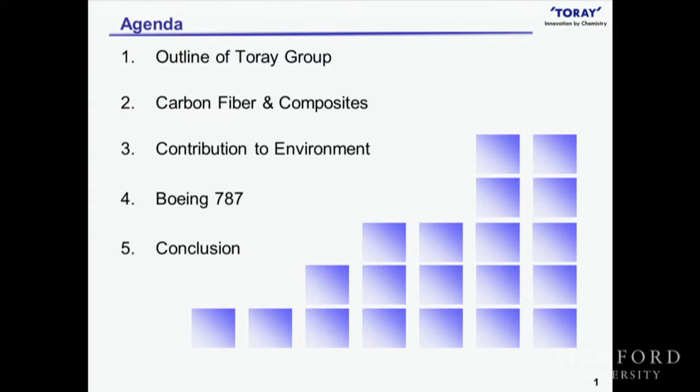This is an outline of Toray Group. Toray was established in 1926, almost 85 years ago, as a rayon manufacturer. The name Toray is an abbreviation of Toyo Rayon. Toyo means Oriental, and rayon means rayon, chemical fiber. So Toray was established as a rayon manufacturer in 1926.

Then we expanded our business into fibers and textiles, plastics and chemicals. Those are kind of our foundation business. However, as you can imagine, fibers, clothing, textiles, or plastics are mature businesses. So we needed to expand into different fields like IT-related products, carbon fiber and composite materials, together with life science and similar areas.

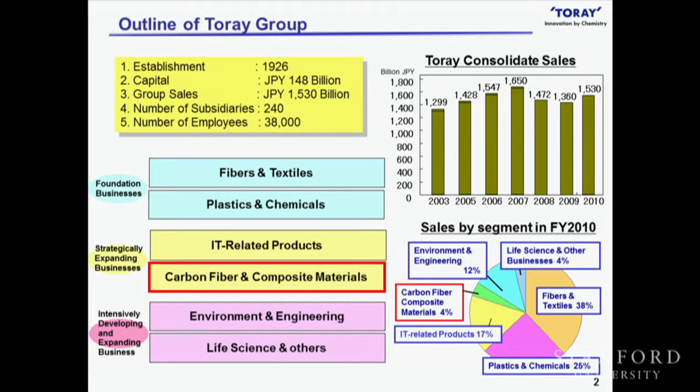Our consolidated sales are almost 1,500 billion yen, which is almost 15, more than 15, maybe 18 billion dollars at today's rate. This is our sales by segment: fibers and textiles, plastics and chemicals. Those are still our main business. However, we put lots of resources into expanding these new businesses.

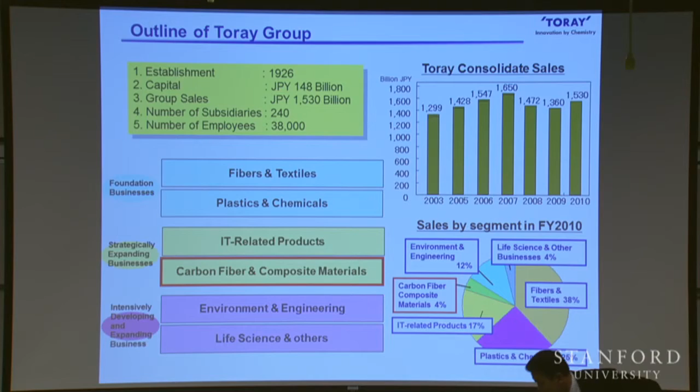This is our major product. I'm not sure you're familiar with Uniqlo. Uniqlo is an apparel retailer in the United States and Japan, and we extensively supply this Heattech material, which has a function where if the underwear absorbs water, it generates heat. So it's very warm even in winter—this underwear can keep body temperature. Those functions allowed us to go into business with Uniqlo.

This winter, Heattech underwear from Uniqlo will sell almost 100 million pieces in a year. Other products: I think you're familiar with SunChips, the compostable or biodegradable bag. Toray Plastics America, located in Rhode Island, produces this biodegradable bag. Other than that, we have interferon medical products that we produce. Then our carbon fiber materials—as I said, Boeing 787 extensively uses our carbon fiber products.

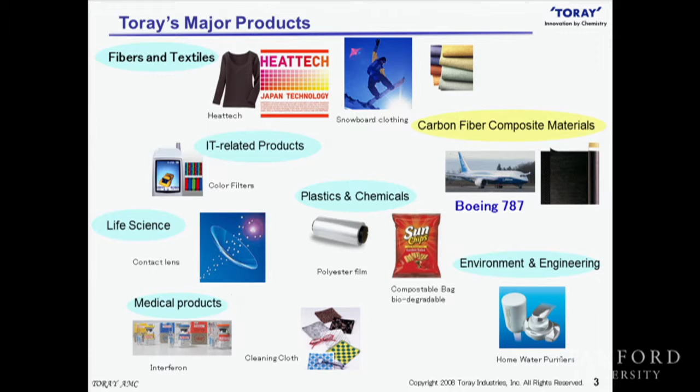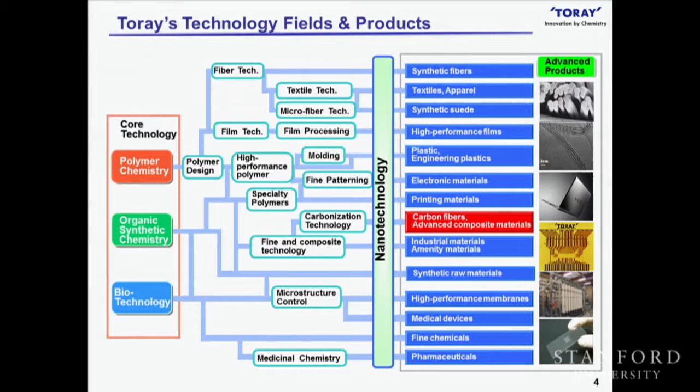Toray is a material company. Our core technologies are polymer chemistry, organic synthetic chemistry, and biotechnology. We combine those technologies, then with nanotechnology we create materials for various products.

This is also a kind of overview of the change in our business fields. This is rayon—we stopped the rayon business in the 1960s. Now it's fibers and textiles, resin and films, and new products like carbon fiber materials.

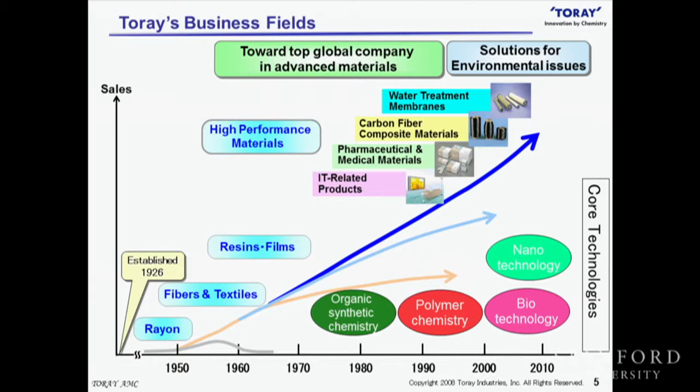Okay, let's change the topic to carbon fiber itself. Carbon fiber is carbon, the fiber. Since fiber means very thin, long materials. If we go to a yakitori restaurant or Japanese restaurant, you can see charcoal. Charcoal is a kind of carbon, however charcoal is this type of shape. However, carbon fiber, we call it charcoal, but in fibrous shape.

So first we make acrylic fiber. Acrylic fiber is used for blankets or sweaters, artificial sweater or something like that - those are the same fiber. And then we burn, or we grill, the acrylic fiber to make carbon fiber.

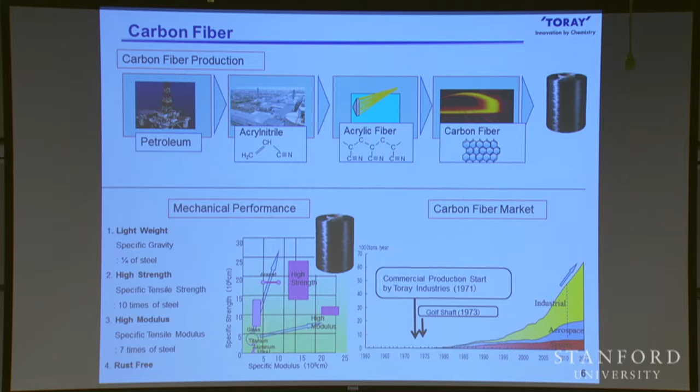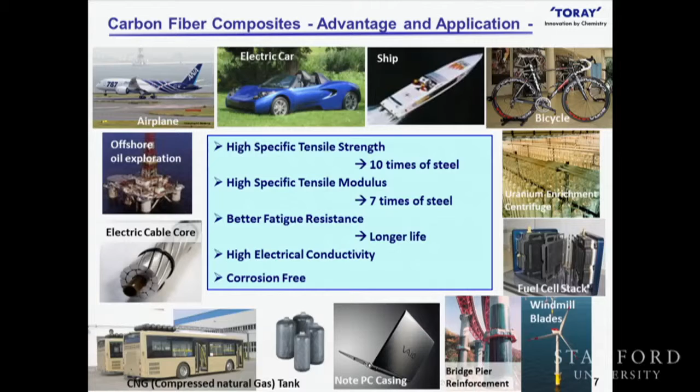These are the applications of carbon fiber. As I said, with those advantages, carbon fiber can be used for airplanes, automobiles, ships, boats, bicycles, uranium enrichment centrifuges, fuel cells, wind blades, CNG tanks, or something like that. Carbon fiber has been applied in various applications.

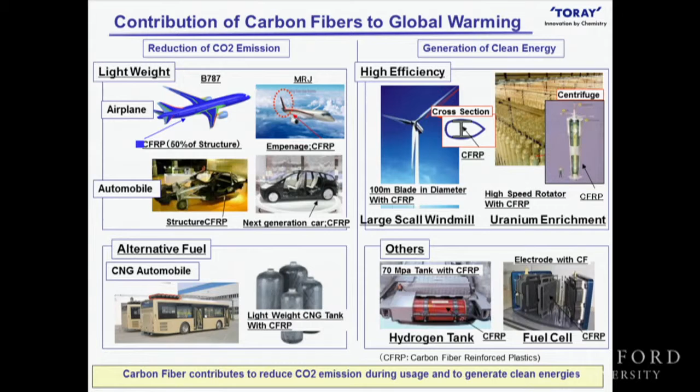So carbon fiber, since it's lightweight, contributes to the reduction of carbon dioxide emission, or generation of clean energy or alternative fuel, or others. Especially the reduction of carbon dioxide emission - carbon fiber contributes a lot to emission reduction. So with several slides, I can explain how carbon fiber contributes to reducing carbon dioxide emission.

JCMA means Japan Carbon Fiber Manufacturing Association. Toray is one of the members of JCMA. For automobiles, we choose a model - for example, those are the specifications of the model of automobile. And this is the specification of a model of airplane. So JCMA is the Japan Carbon Fiber Manufacturers Association, yes.

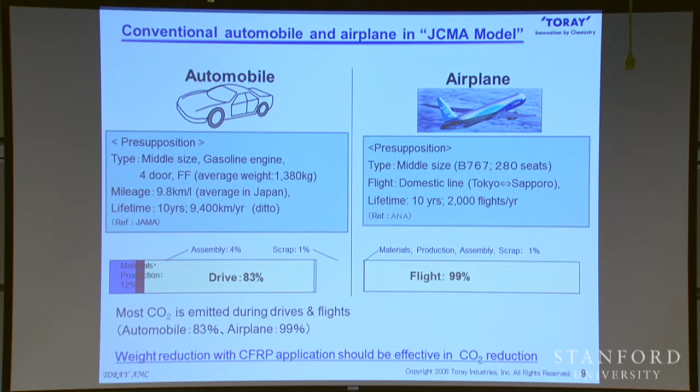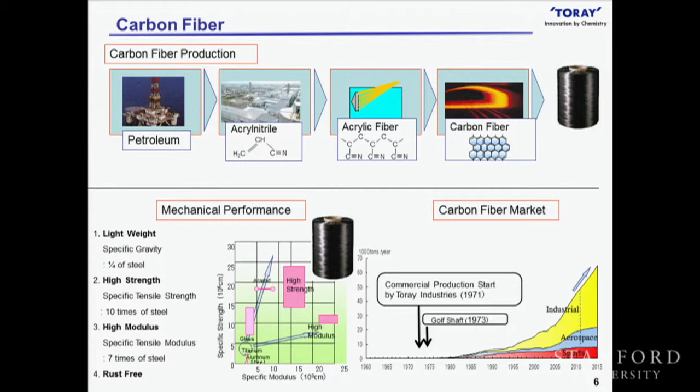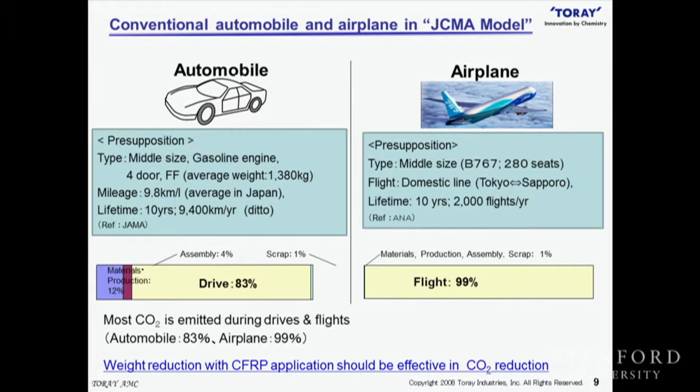Since carbon fiber - as I said, we burn or grill the acrylic fiber to make carbon fiber - during producing carbon fiber we use lots of energy. However, carbon dioxide emission in material production is only 12%. Drive or flight is the major portion emitting carbon dioxide.

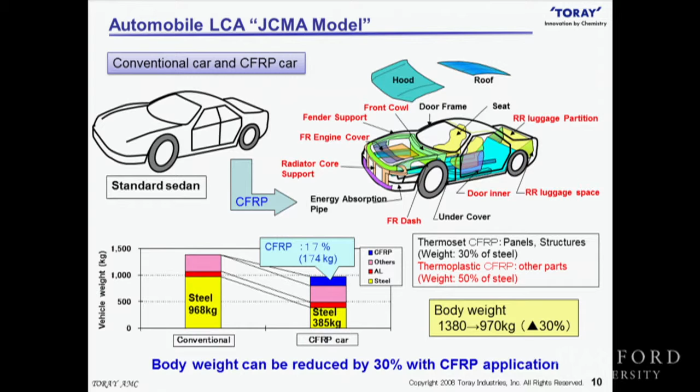And if we use carbon fiber in the automobile, we can reduce the body weight from 1,400 kilogram to less than 1,000 kilogram - a 30% reduction can be achieved by using carbon fiber reinforced plastics. That's a very important acronym you'll hear more about in the future, CFRP - carbon fiber reinforced plastic.

And if the airplane uses carbon fiber reinforced plastics, 20% weight reduction can be achieved. Actually, this is a Boeing 787 - the blue portion is carbon fiber. The main wing, fuselage, empennage, and vertical fin - those parts are made of carbon fiber reinforced plastics. So 20% weight reduction can be achieved.

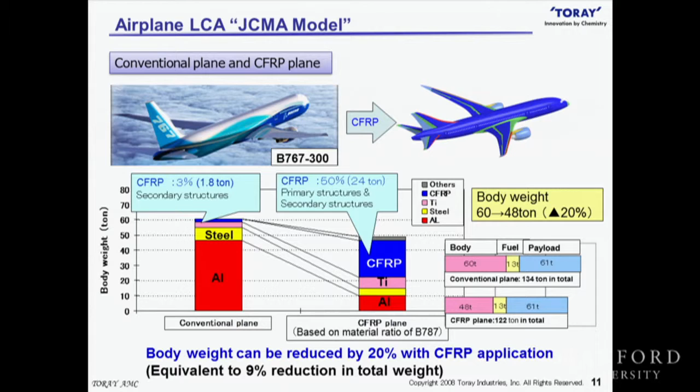So for automobile, 30% weight reduction means 0.5 ton carbon dioxide reduction per car per year. And for airplane, 20% weight reduction means 2,700 ton carbon dioxide emission can be reduced.

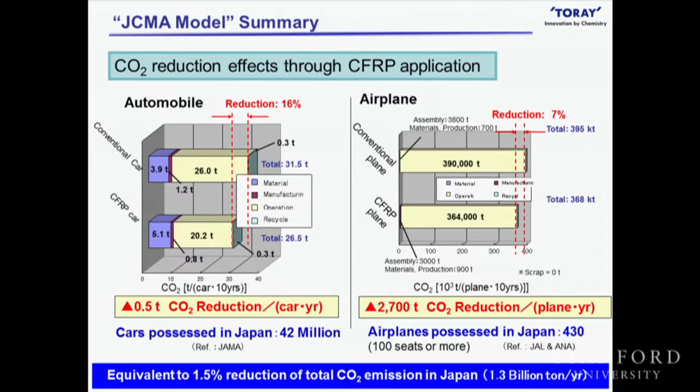So for automobile carbon fiber: if we produce 1 ton of carbon fiber, 20 tons of carbon dioxide is emitted. However, if automobile uses 1 ton of carbon fiber, 50 tons of carbon dioxide emission is reduced - meaning 30 tons of carbon dioxide can be reduced during the lifetime of the automobile. That means 19 million tons of carbon dioxide across 37 million automobiles in the world.

How about the airplane? Carbon fiber 1 ton, 20 ton carbon dioxide emission - that's the same. However, if airplane uses 1 ton of carbon fiber, 1,400 tons of carbon dioxide can be reduced - huge. So that means from the viewpoint of LCA, life cycle assessment, of automobiles or airplanes, carbon fiber is considered an environmentally friendly material. Even though the production of carbon fiber emits carbon dioxide, if we consider it from the viewpoint of LCA, carbon fiber is a very environmentally friendly material.

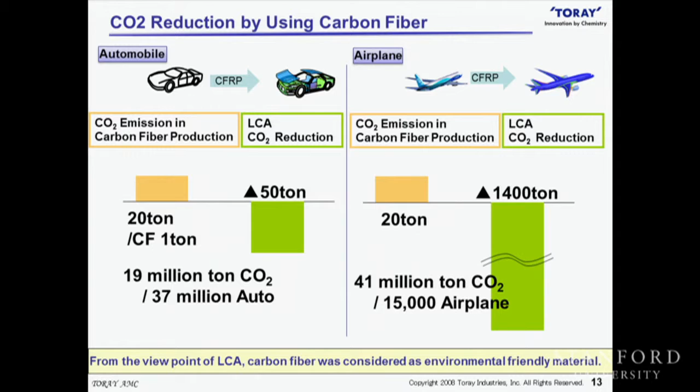Okay, let's change the topic a little bit. I think you can understand that carbon fiber is mechanically a very superior material compared to steel, and also economically and environmentally friendly material. However, it took a long time to get to this point, the 787.

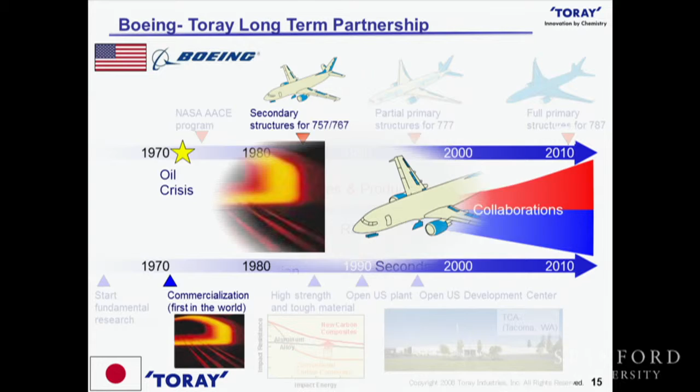We need to work together with airplane manufacturer Boeing. First, we commercialized the carbon fiber, and Boeing used our carbon fiber as a secondary structure, as kind of a test. Secondary structure means if this structure broke, the airplane can still fly, even though this part broke or failed.

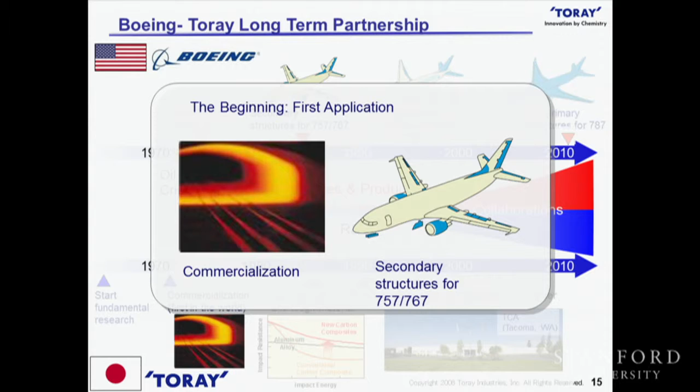Those are not essential materials for the airplane, like the spoiler or flap. Boeing first applied carbon fiber to the secondary structure for the 757 or 767 in the 1980s. Then Boeing first applied our carbon fiber to a primary structure of the 777, the empennage, those bars to support the fuselage. Those are primary structure.

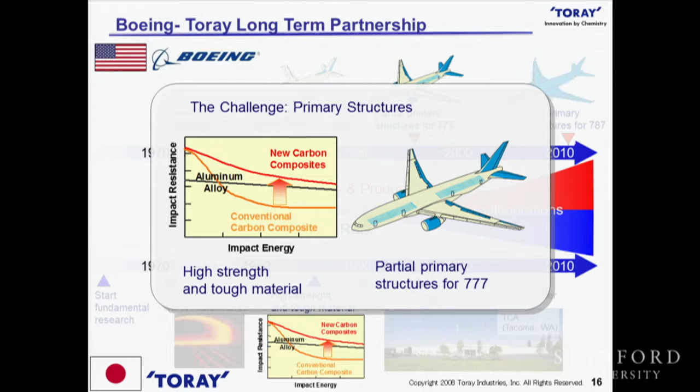And in order to achieve the primary structure carbon fiber, we had a very big breakthrough in technology. As you can see, this is impact resistance, and this is the impact energy. Horizontal axis is the impact energy.

So for conventional carbon composite, our CFRP, if big impact energy is applied, impact resistance deteriorates very much. For example, if impact energy is applied to this material, it easily breaks. That was conventional carbon composite. So we couldn't use this kind of carbon composite for primary structure, because if something fell on the empennage, it would easily break. It's not an airplane material.

So we applied energy absorbing material in the carbon fiber composite. Then we solved these issues. And then Boeing applied our carbon fiber to the 777 primary structure.

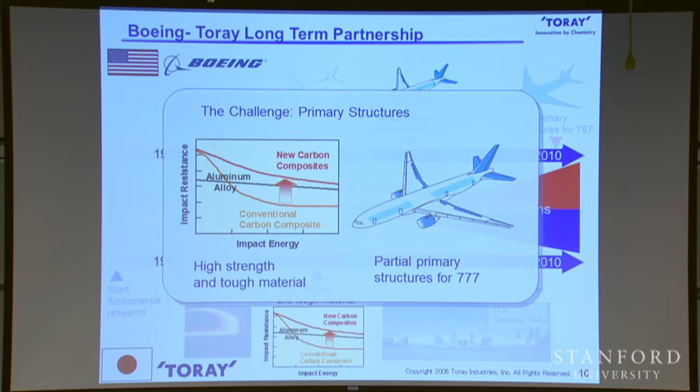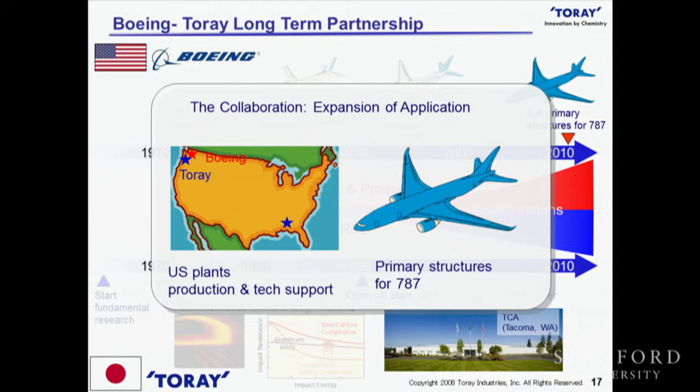After that, we put a plant in the United States. This is a carbon fiber plant, Toray Composite America. This is a resin-impregnated sheet product supplied to Boeing, and Boeing decided to use Toray's carbon fiber for all the primary structure of Boeing 787.

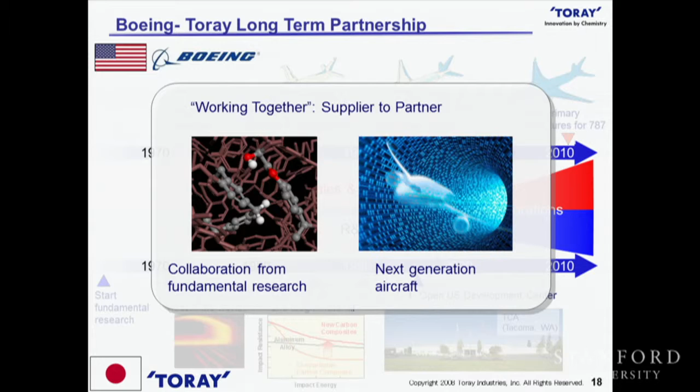Then we also worked together with Boeing on next generation aircraft. So it was not only the good performance of the material, but we also showed Boeing that carbon fiber is an environmentally friendly material. However, it takes 20 or 30 years to achieve Boeing's decision to use carbon fiber extensively in primary structure.

So let me summarize the carbon fiber application for airplanes. In 1982, Boeing applied carbon fiber to the 767 as a secondary structure, just 3% of the aircraft.

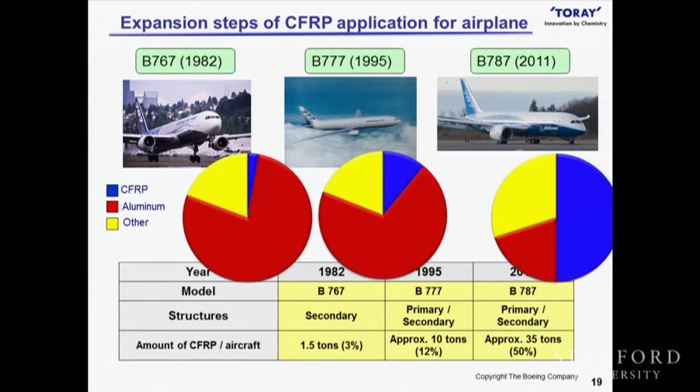In 1995, Boeing decided to use carbon fiber as a primary structure for the 777, almost 10 tons of carbon, 12% of structural weight. Then for the 787 in 2011, primary structure was approximately 35 tons, almost 50% of structural weight made by composite, a 20% reduction.

So in the 40 years after we commercialized the carbon fiber, we have been studying to make stronger carbon fiber. Compared to 1970, it is now almost 5 times stronger than the first commercialized material.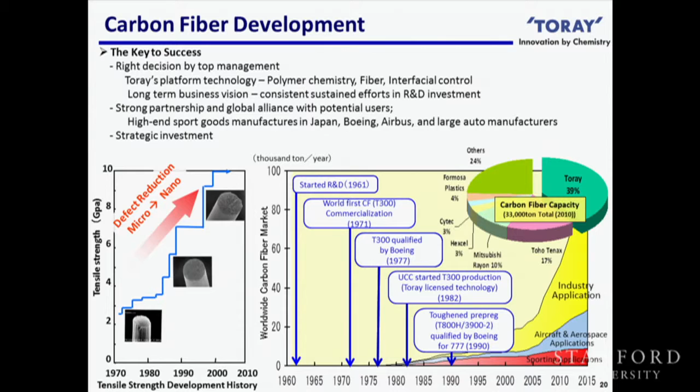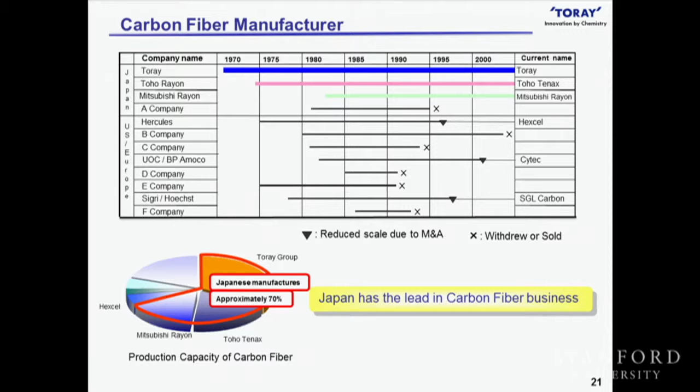Toray right now has almost 40% share of the carbon fiber market. Since it takes time to apply a new material to a good application, there were lots of American companies trying to enter this carbon fiber market. However, they gave up, almost all of them, since it takes time to expand the business. So currently, the three Japanese producers, Toray, Toho Rayon, and Mitsubishi Rayon, have the lead in the carbon fiber business. This is the current situation of carbon fiber.

Okay, this is my thought on how to achieve successful innovation, or to realize innovative material. We need technology as well as management. For technology, we need to establish a world number one position in core technology, and then we need to put effort into continuous development.

For example, new material takes time. However, it is unable to make a revolutionary aircraft like Boeing 787 without new materials. Boeing calls the 787 a Dreamliner, but that is not just Boeing's dream, it's Toray's dream too. We dreamed to make a carbon fiber airplane. So Boeing 787 is kind of a realization of our dream.

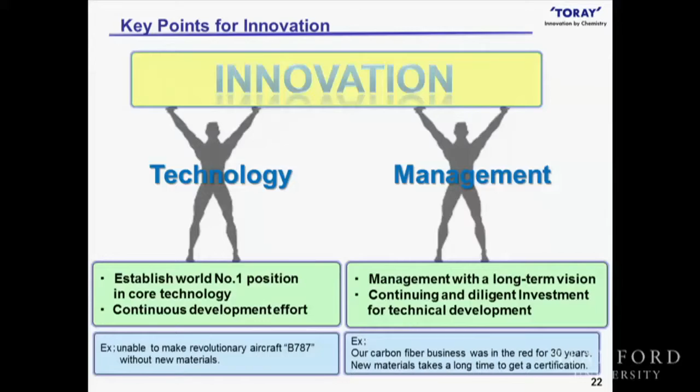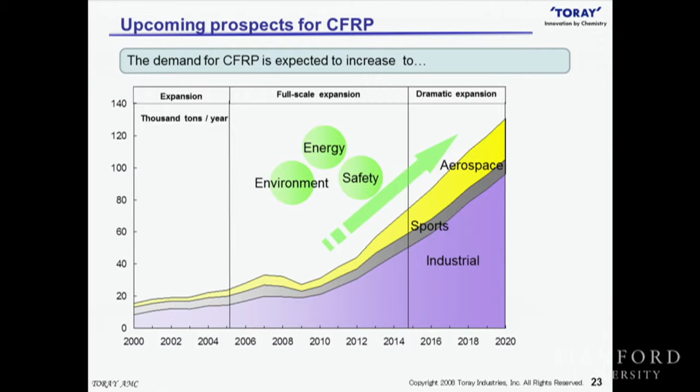Okay, this is my last slide. So we really believe that carbon fiber will expand its application. But a key point is cost reduction. The price of steel is almost $1 per kilo or something like that. But carbon fiber price is more than $10 per kilo.

So we need to make an effort to reduce the cost continuously. Of course, carbon fiber has superior performance. However, in order to make carbon fiber the main material, we need to reduce production cost as well as total cost, through collaboration with airplane companies or automobile companies. And also we need to look for new types of demand, automobile or aerospace development. SpaceX is using a lot of carbon fiber right now. So we really hope to expand this application. Okay, that's my presentation. Yes, thanks very much.